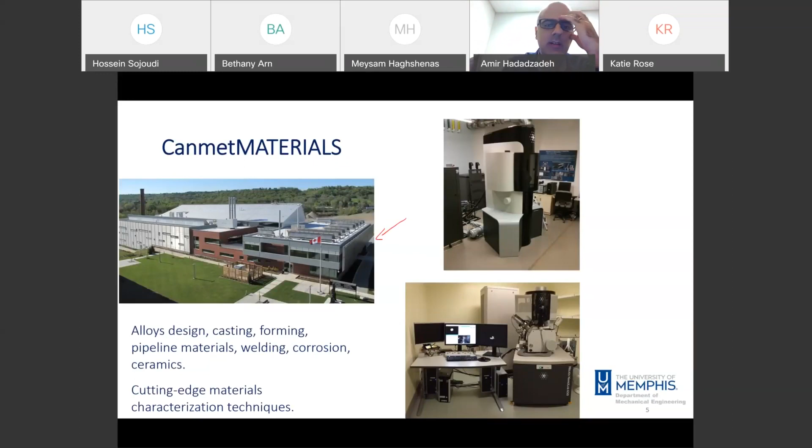Canada. In MAMCE, the Marine Additive Manufacturing Center of Excellence, we had a pretty big research group, engaged in broad collaborative research with different universities coast to coast in Canada. New Brunswick is here, and Canmet Materials was located in Hamilton, close to Toronto. So I spent most of my time in Ontario rather than New Brunswick. The reason I was at Canmet Materials was to use their state-of-the-art research facilities, including EBSD and TEM. This picture was taken during summer. I guess now they still have snow on the ground, and it was pretty cold, similar to your weather.

In terms of my research approach, my background is in materials science and engineering, and I'm really interested in the materials science paradigm, or tetrahedron, where we have 4 vertices: processing, structure, properties, and performance. It's very well known. I'm quite sure you have seen it before in any materials science textbook; if you open it, the text will start with this tetrahedron. Everything in terms of properties of a material is affected by the structure, and structure is determined by the processing. So it's very important to have knowledge of that.

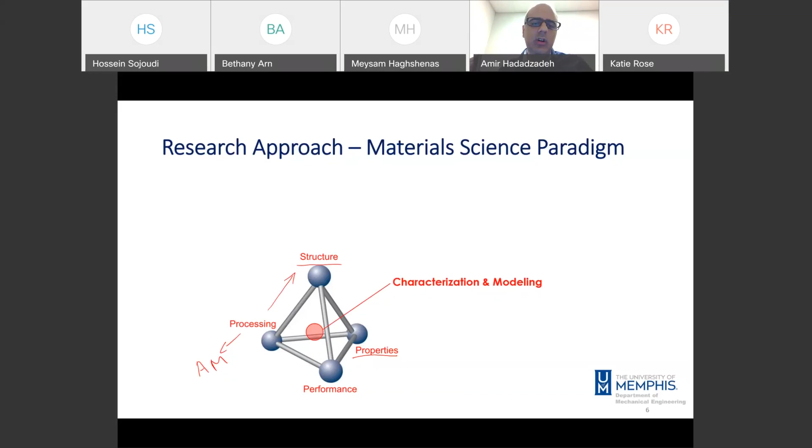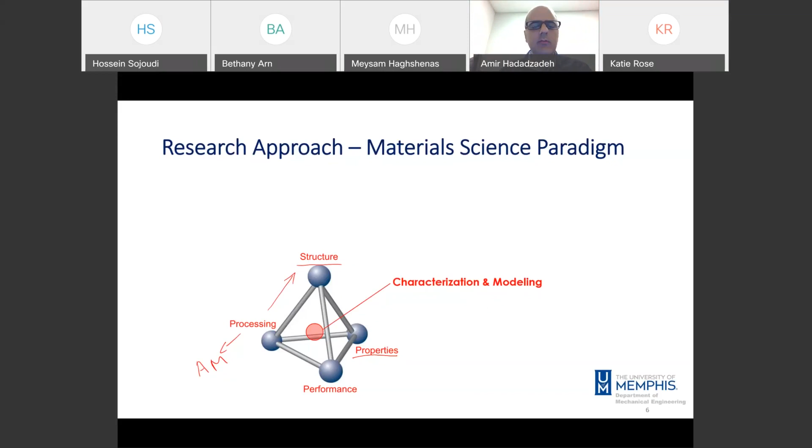In the case of additive manufacturing, processing is of course additive manufacturing, and what I'm doing is characterization and modeling. So I'm in the middle of this tetrahedron. I characterize the structure at different length scales to understand what is going on in the structure of the material, how the process has affected it, and how that structure will determine the properties. Today I'm going to talk about my research at MAMCE during those 2 years of postdoc.

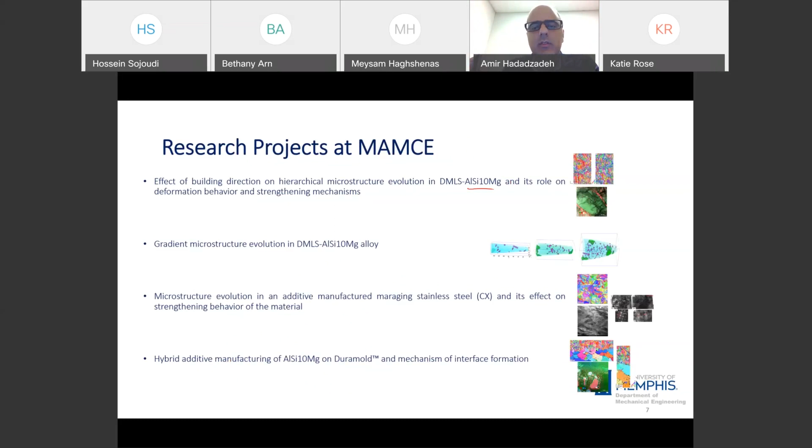So in MAMCE, I was engaged in a couple of research projects on different types of materials, including aluminum alloys. AlSi10Mg is probably the most common material for selective laser melting, which is a kind of additive manufacturing. Also, another type of metallic material, maraging steel CX, nickel aluminum bronze, which is a copper-based alloy, Ti6, maraging steel, and stainless steel 316L.

So a variety of materials, and in all of them, I was interested to explore the hierarchical microstructure. And again, if you go to the literature related to additive manufacturing of metallic materials, in most of them, you will see this term, hierarchical microstructure. So it means at different length scales, we have different features.

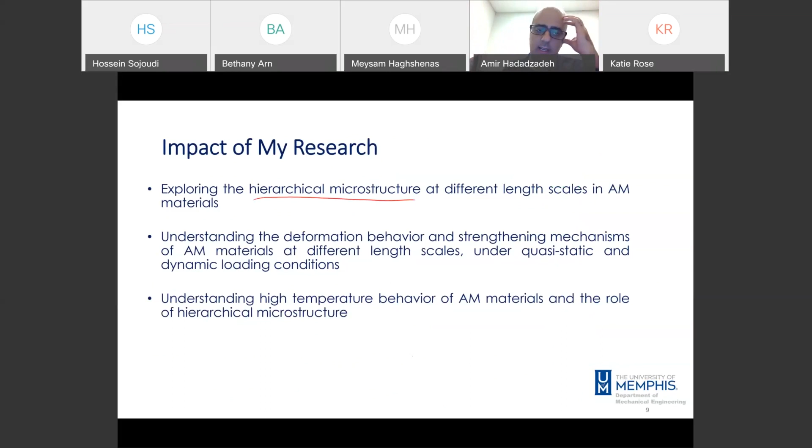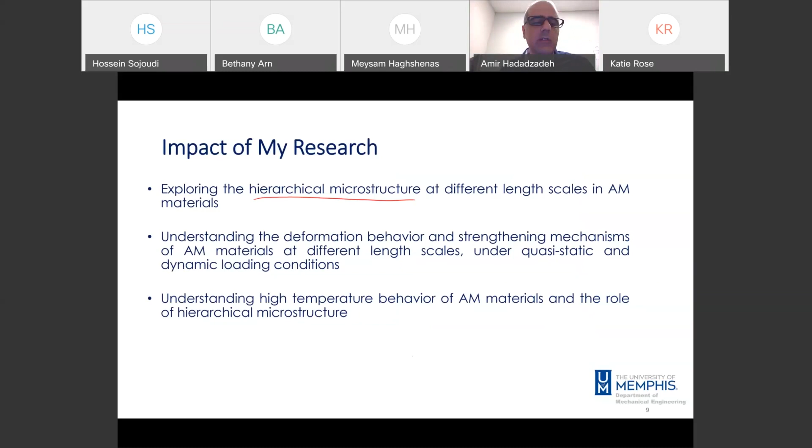So I'm exploring those features. And I'm trying to understand the effect of those features on the deformation behavior of the material and the role that they are playing in terms of the strengthening of the material, and also their effect on high temperature behavior of AM materials. We started a research back in Canada, and still I'm interested in that research, hopefully to continue that.

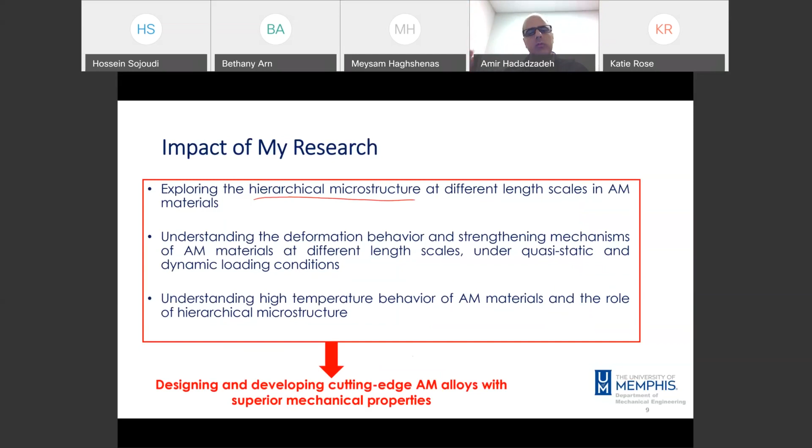And the outcome of this research, by understanding the effect of the processing on the structure of the material and how microstructure will enhance the properties, the outcome will be designing and developing advanced AM alloys with superior mechanical properties. We can also study other types of properties in the materials, like corrosion properties, physical properties, and so on and so forth, and try to correlate those properties to the microstructure as well.

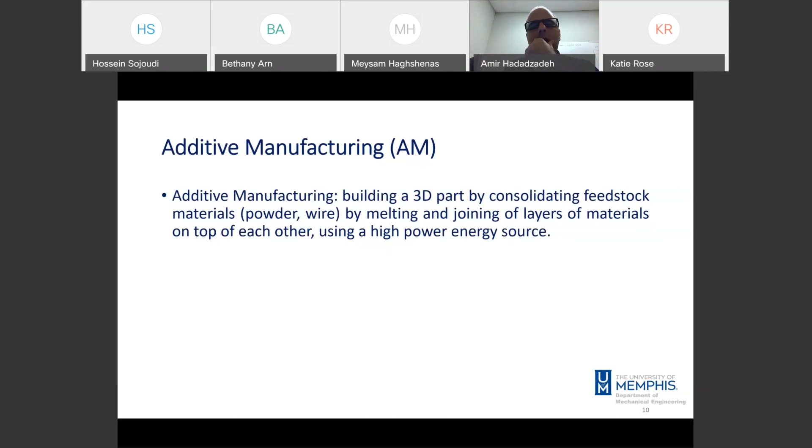So I'm pretty sure most of you are familiar with additive manufacturing. In additive manufacturing, we build a three-dimensional part by joining feedstock material on top of each other in a layer by layer manner. So in many cases, specifically for metallic materials, we melt and join those layers on top of each other. We usually use a high power energy source, and based on the ASTM standard, in general, we have two types of metal AM technologies.

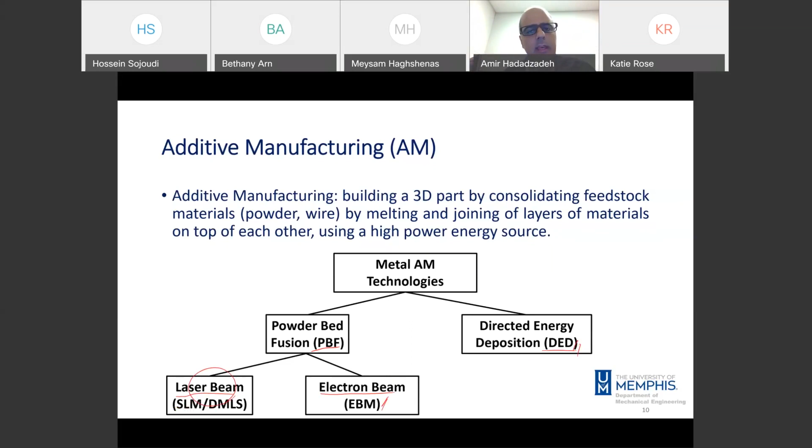We either have powder bed fusion, PBF, or directed energy deposition, DED. And depending on the type of the power energy source that we are using, we either have a laser beam or an electron beam. And the process that uses a laser beam is called SLM or DMLS, selective laser melting. And most of my research is around here. I've done some research on EBM and DED as well, but today I'm going to talk about only SLM.

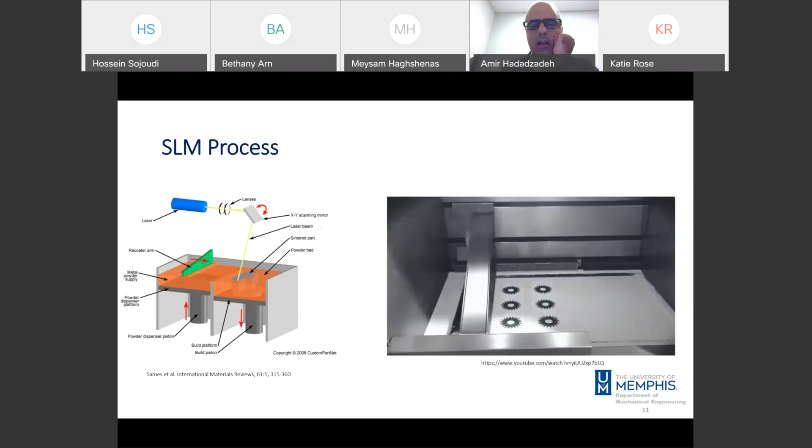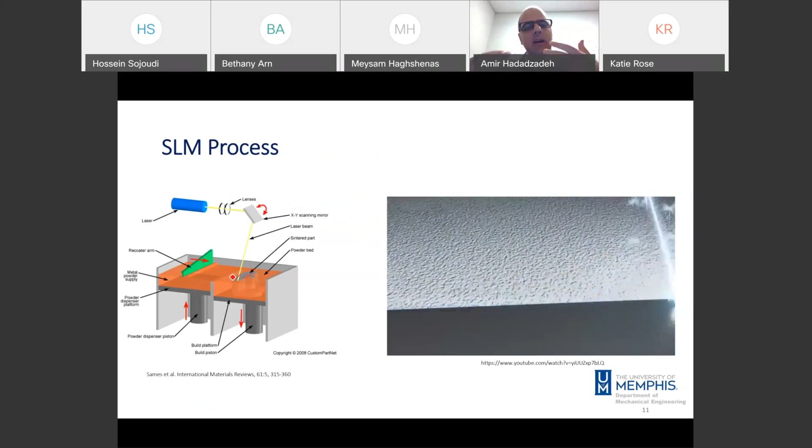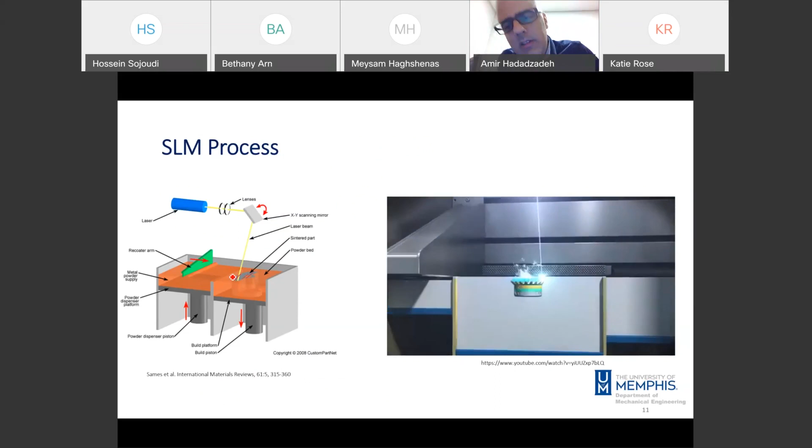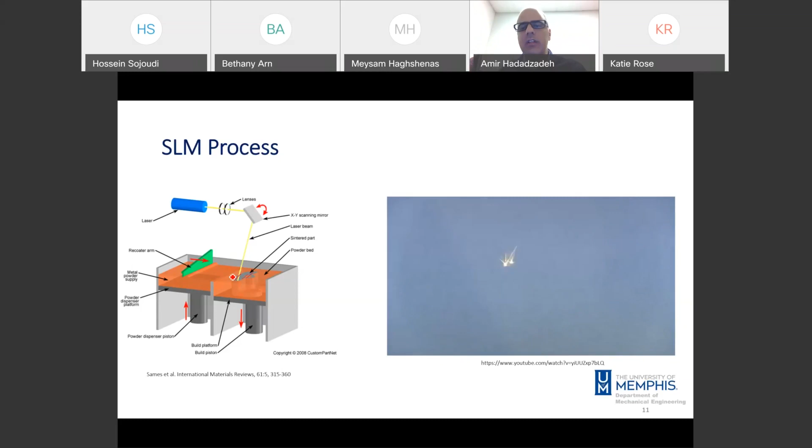So in SLM, I'm not sure whether I played the movie, hopefully you can see it. But in SLM, again, I'm quite sure you know that we have a bed of powder, and a laser beam will melt layers of material, and by adding powder on top of each other, we just build a component layer by layer. So there are many advantages in terms of using additive manufacturing. For example, we can have on-demand fabrication. We can fabricate complex parts in just one step of process, and many other advantages, as you know.

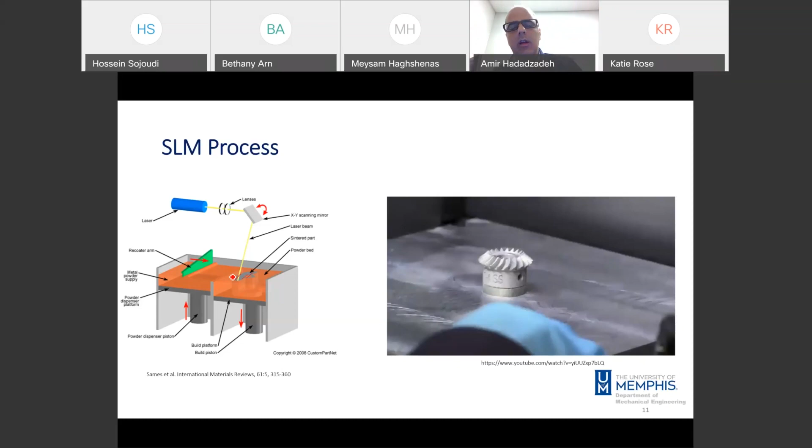But besides that, there is another aspect here, and that's the properties of the component that we are obtaining. It's not just about making a complex shape component. We should ensure that the final properties are desirable. So there are two perspectives in studying the properties, or specifically the mechanical properties of SLM components. We either study them based on the structural integrity or from material science.

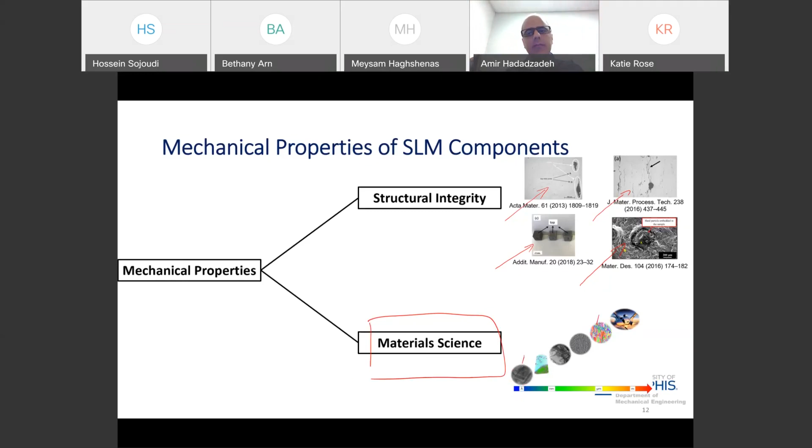But another point of view here, which I'm interested in, is studying the material from a material science point of view. To look at the microstructure of the material, to see how that microstructure at different length scales, from atomic scale, as you see here, up to sub-millimeter scale, how these features will affect the properties.

So I start with a case study here about development of hierarchical microstructure in SLM AlSi10Mg. AlSi10Mg is the most common aluminum alloy used for selective laser melting, because the composition of this alloy is close to the eutectic composition of the aluminum silicon system. So we have a narrow range of solidification, which is pretty helpful in terms of making a component without any significant defect.

So in this study, we fabricated two types of samples, two rod-shaped samples based on their orientation with respect to the building direction. We called them horizontal sample and vertical sample. The geometry of both samples was the same, but for the horizontal sample, the longitudinal axis of the sample was perpendicular to the building direction. And for the vertical sample, the longitudinal axis was parallel to the building direction. And we started

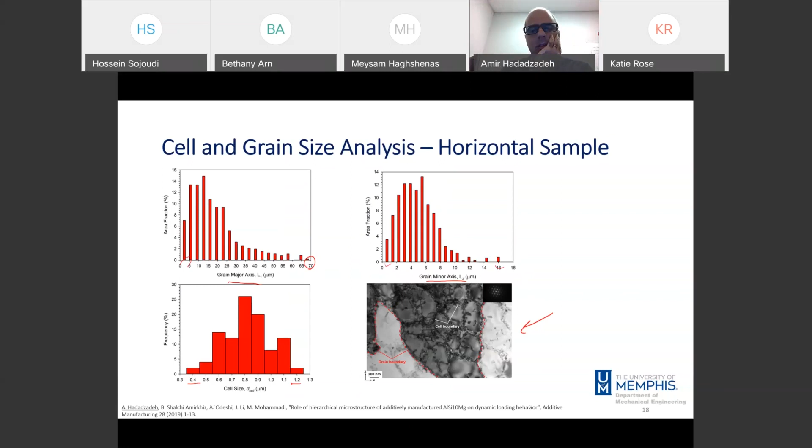So we study the sample by TEM, and this microstructure here shows the TEM structure in the 011 zone axis of the aluminum, and the red dashed line shows the grain boundary, and inside each grain we see several cells. That's why we see such a difference in the grain size and cell size.

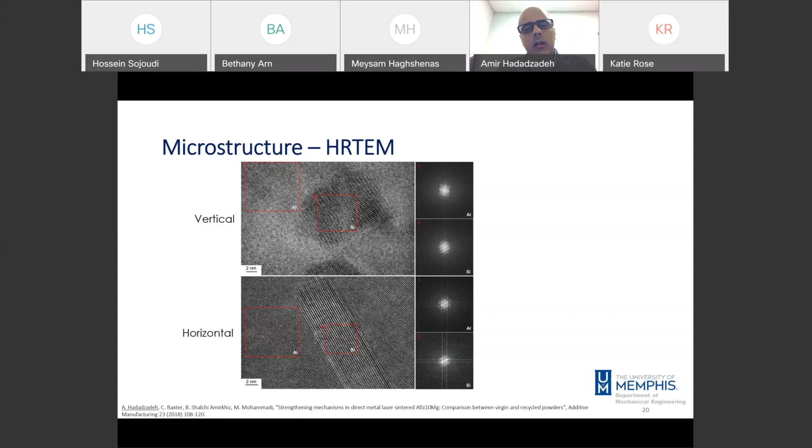I studied the silicon precipitates using high-resolution TEM, and we can see the atomic structure, and there is a crystallographic relationship between the aluminum matrix and silicon, as you see in this picture here. Another way to study the precipitates is using atom probe tomography. So in the APT technique, we can study the chemistry of a material atom by atom. And here, in the case of the vertical sample, this is a separate study, but it's quite interesting in terms of analyzing the microstructure consistency in AM material.

So if we have a long sample, like the vertical rod, from bottom to top of the sample, the material will experience different thermal histories. At the bottom of the sample, we have more repeated thermal cycles experienced by the material because the heat transfer direction is from the top layers to the bottom layers. That's why we see a difference in terms of the structure or the morphology and characteristics of the precipitates.

Here in the top of the sample, we see large silicon precipitates and very tiny magnesium-rich precipitates. By moving to the bottom of the sample, those silicon precipitates start to dissolve because these silicon particles are not a stable phase in this system, because in the aluminum silicon phase diagram, we don't have silicon precipitates or particles. These precipitates or particles develop because of the supersaturated aluminum matrix, because the silicon didn't have enough time to diffuse from the matrix to the eutectic wall. And that will affect the precipitate characteristics.

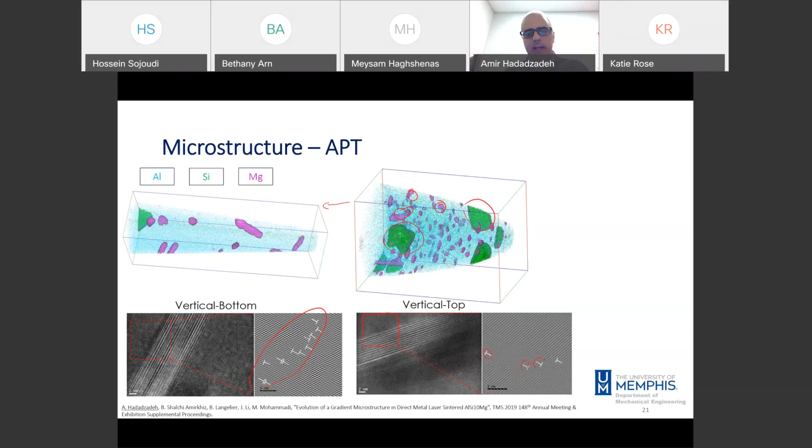So here on the top, we have a fully coherent precipitate with the matrix. Over the interface, we have probably a couple of dislocations because of the mismatch between the precipitate and the matrix. But at the bottom of the sample, as you see here, more dislocations evolve in the structure because of the mismatch.

So that's the general picture in terms of the hierarchical microstructure in AM materials, in this case, SLM. But there is a question here regarding the effect of hierarchical microstructure on the mechanical properties.

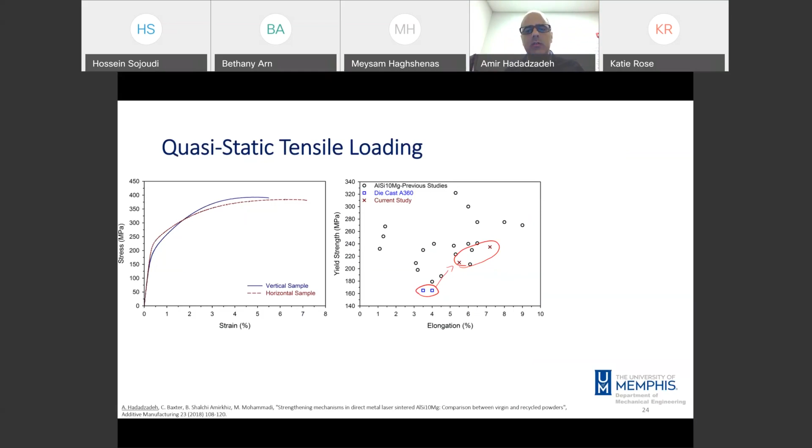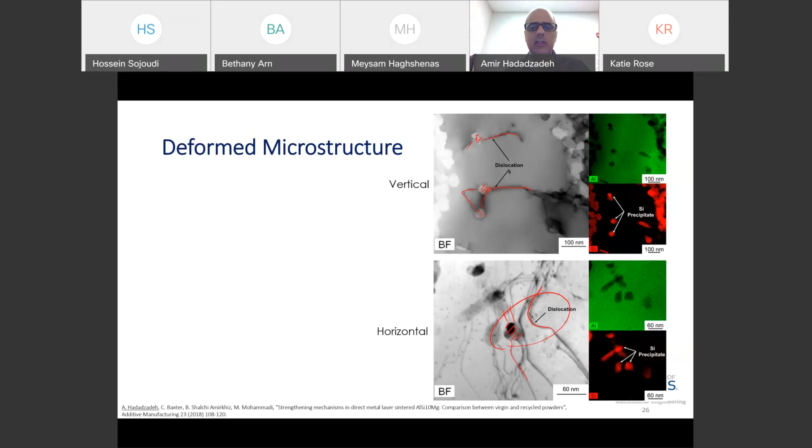If the dislocations are able to bypass the precipitates, like this case here, we see the effect of that. So this dislocation has gone toward the silicon precipitates after bypassing. And also there are some other dislocations that are still pinned by the precipitates. So precipitates are playing a role in the strengthening of the material because, again, they are hindering the motion of the dislocations. Considering these effects, we can use the fundamentals of alloy hardening to study the strength of the material.

So as I mentioned, the eutectic silicon walls are acting as barriers against the dislocation motion. So they act like grain boundaries. So their role is similar to the Hall-Petch effect. We have silicon precipitates. They can act as an Orowan strengthening mechanism, and we have the pre-existing dislocation network. So we have dislocation hardening as well, because in presence of other dislocations, there is an interaction, in most cases, a repulsive interaction between dislocations. So we have more hardening in the material.

Considering that, I don't want to go through all the details of the math here. I was able to predict the yield strength. Also, I measured the yield strength through the experiments, and there is a very good agreement between the measured values and the calculated ones, specifically for the case of vertical sample. As you see, 215 was predicted, and the measured value was 210 MPa, pretty close. But there is a slight difference between the yield strength in the case of horizontal sample.

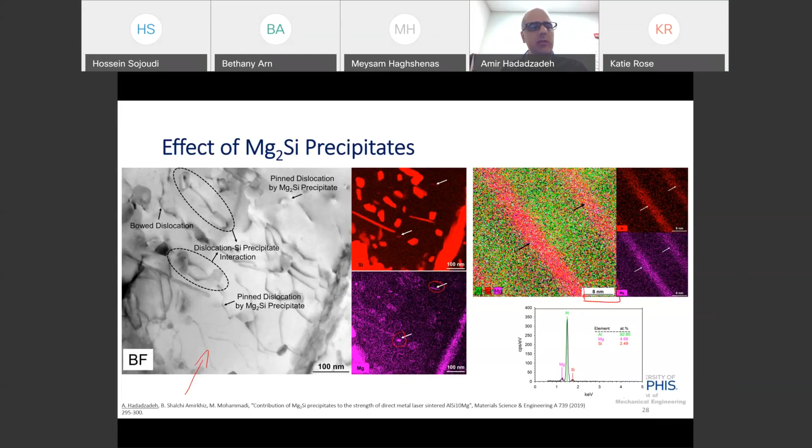Some cylindrical samples were machined out from that rod, and by using the split Hopkinson pressure bar, we conducted high strain rate deformation on the material at different strain rates. So here, stress versus strain at different strain rates from 800 per second up to 3200 per second. So there are two deformation regimes. The top graph shows the material behavior under high strain rate deformation. In these three cases, 800, 1200, 1400 per second, we see an initial hardening in the material up to a peak flow stress. Here is the peak flow stress. And then after that, once we stop the test, we have a softening.

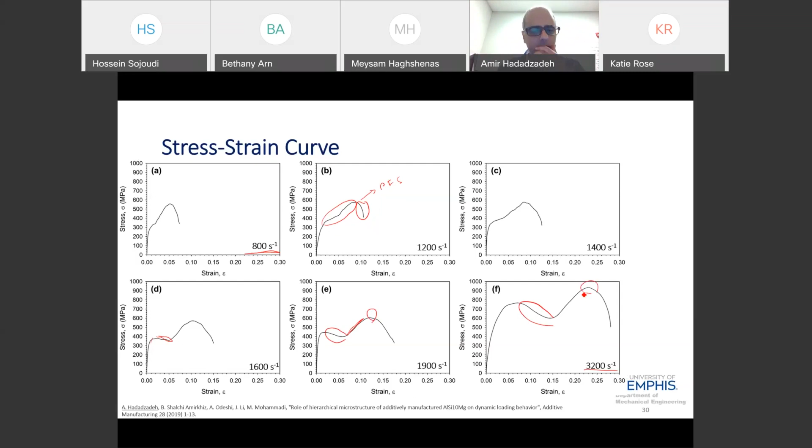This softening is not related to the behavior of the material. This softening is due to the reduction in the strain rate because we deform the material and we stop it. So during deceleration of the bars, we have such a drop in the stress. But in the bottom graphs, we see a different behavior. So after that initial hardening and reaching the first peak flow stress, now we have a softening in the material. So this softening regime in the material is observed, which is followed by the second hardening regime up to the second peak flow stress. So these are two different types of material behavior.

Again, to study that, I used the same hardening fundamentals: Hall-Petch, Orowan, and dislocation. And now we have another component, which is the strength increment due to strain rate. And there is a semi-empirical equation for that in the literature to correlate the increase in the strength of the material because of strain rate to the level of strain rate, and A and M are material constants. On the right hand side, I have shown the effect of strain rate on the strength of the material, both yield strength and the peak flow stress for different strain rates.

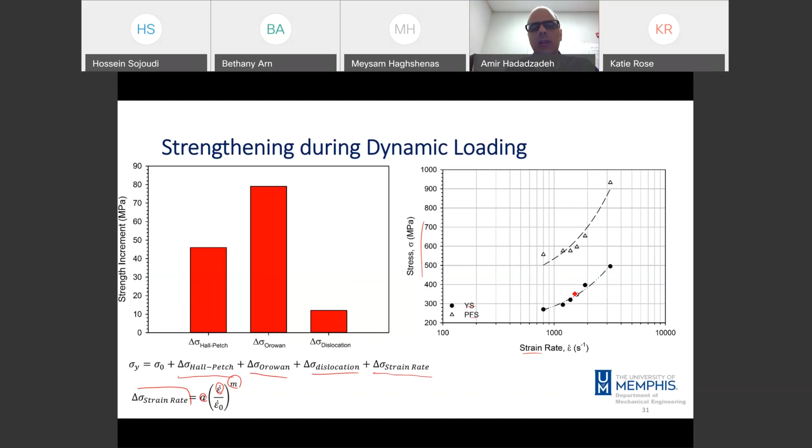If we subtract these three components, the Hall-Petch, the Orowan, and dislocation, from the values here, we can now end up with the increment because of the strain rate. Okay? And by doing a curve fitting, the values for SLM AlSi10Mg are shown here. A is 77 and M is 1.18. If we compare it to conventional aluminum alloys from the literature, you see different values, a significant difference between these two values, A and M. Or if I plot a graph for the conventional alloys on this graph, we'll have something like this. There is a significant difference between the two types of materials.

And again, the reason for such a difference is the hierarchical microstructure. I looked at the grain structure of the material using EBSD in two different deformation regimes at 1400 per second and 3200 per second. As you see, the deformation in the single peak regime resulted in evolution of a discontinuous low angle grain boundary network in the structure, the blue lines in here. By increasing the strain rate, those networks developed, and now we have a well-developed continuous network of low angle grain boundaries.

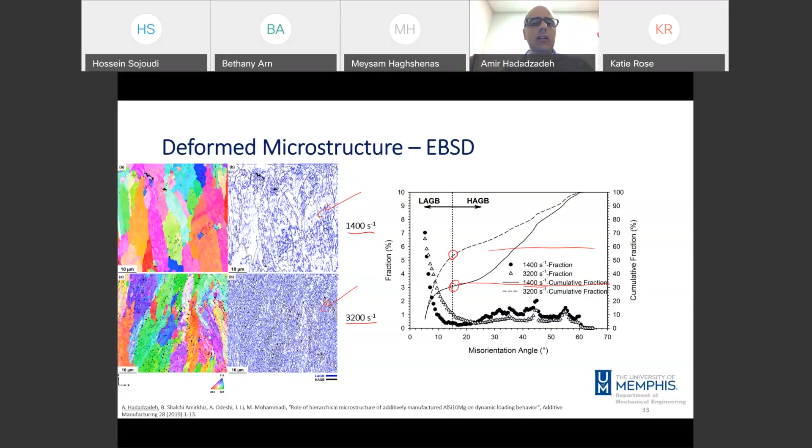If we analyze that, we see that for the 1400 per second sample, only about 30% of the structure is covered by those networks. However, by increasing the strain rate to 3200 per second, now about 60% of the grain structure is low angle grain boundaries. To analyze that, I studied the structure by TEM.

Again, since we are deforming the material, we have an increase in the density of dislocations because of dislocation motion and evolution of new dislocations. By increasing the strain rate, we'll have more heat in the material. The temperature will rise because of the effect of strain rate. Now, there's another driving force for motion of dislocations. Because of the temperature rise, the dislocations can rearrange and we can have recovery. Because of the rearrangement of dislocations, low angle grain boundaries start to develop in the material.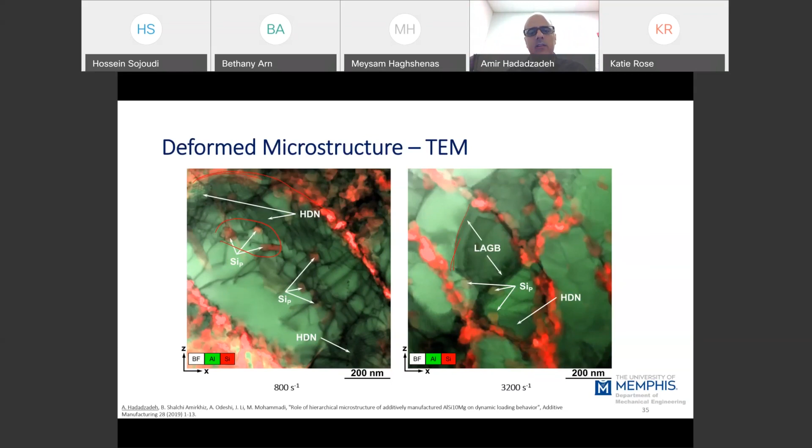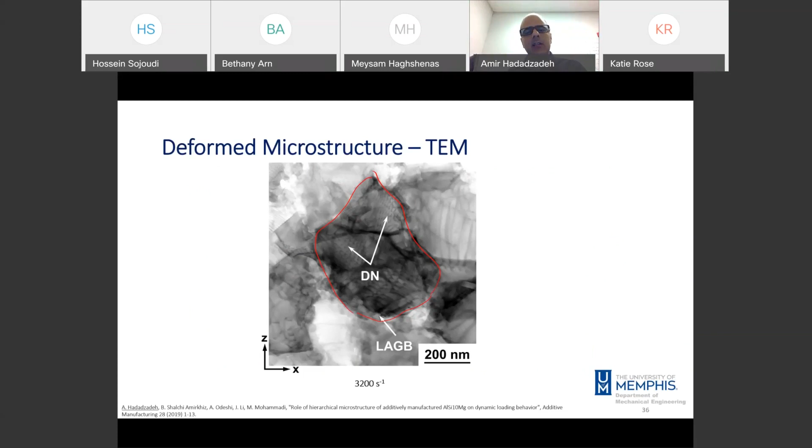Now for the second hardening regime, again, we have generation of new dislocations at high strain rate. After evolution of low angle grain boundaries, we have nanoscale grains. One of them is shown here, and they're bounded by low angle grain boundaries. Now the formation will continue, and because of the deformation, we have evolution of new dislocations inside the grains. That's why we have the second hardening stage. So the hierarchical microstructure in SLM affected both quasi-static and dynamic loading behavior of the material.

Since it's 12:50 or 1:50 your time, I can stop here because I have some other slides on SLM Corrax. I prefer to have more interaction with you, so I can stop here. Hopefully in future I can share the results on SLM Corrax, which is quite interesting, with you. But if you don't mind, I can stop here and answer any questions, or I can briefly go through these results. It's up to you.

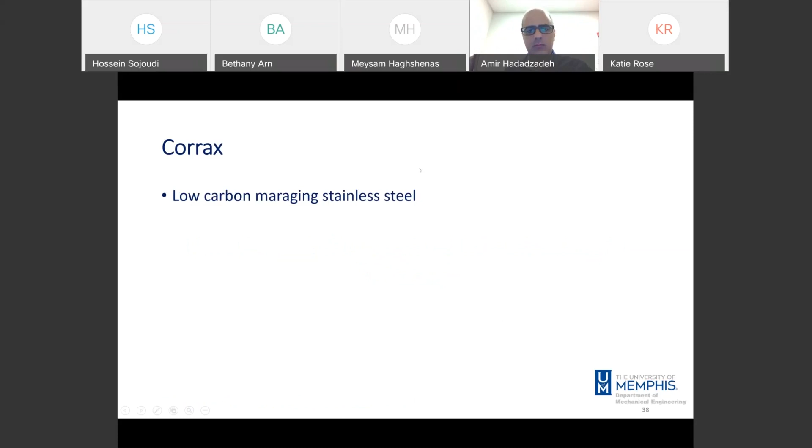Sure. Thank you. First of all, thank you very much. A very interesting talk. I think in the interest of time and to allow more interactions, perhaps it's better to stop here. So I'm going to ask everyone in the audience to please put your question. We have had a little bit of confusion. You can put your question in the chat box, or you can put it in the Q&A. If it's in the Q&A, just select all panelists. If you haven't heard your question, I'm going to go with names. Please put your question up there again.

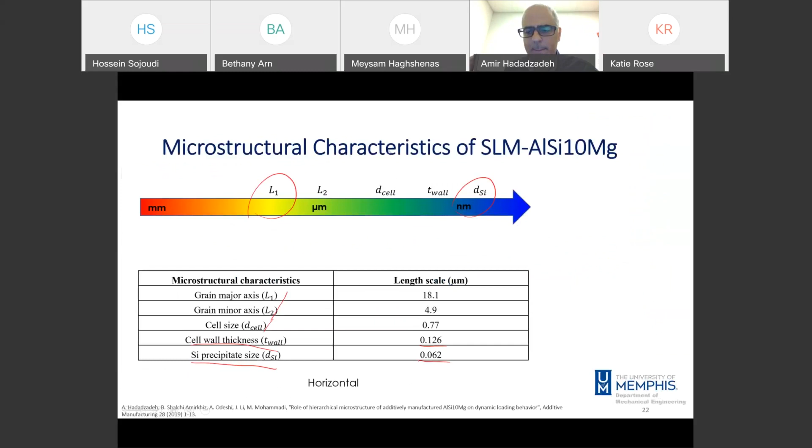So one question was about slide number 16, and that question is from Ravi. He asked what is the difference between vertically and horizontally fabricated samples when it comes to grain structures and grain boundaries? Okay, that's a great question.

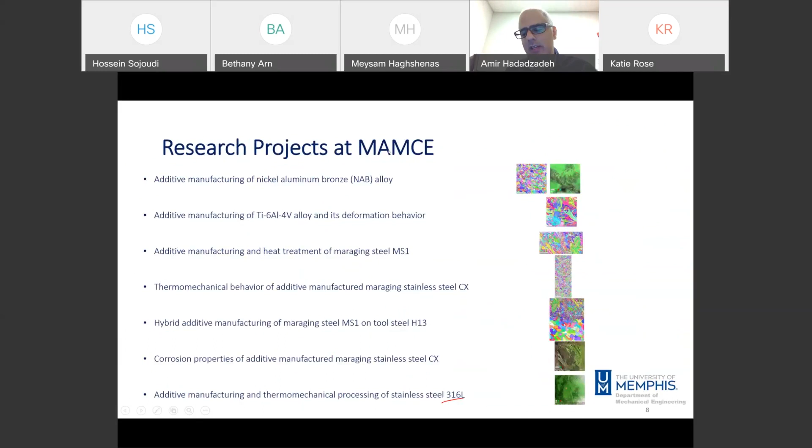Sorry, okay, it's not stopping. It's not my fault. I'm not touching anything. It's just going by itself. Let me try to exit. Okay, that's good. I jumped to 16. Yes.

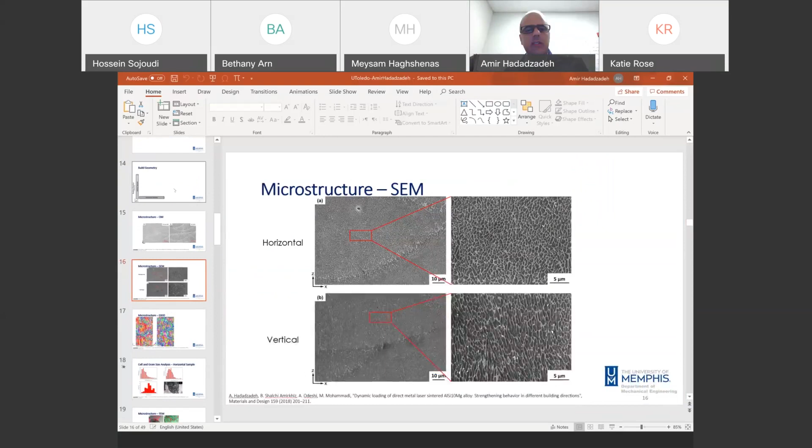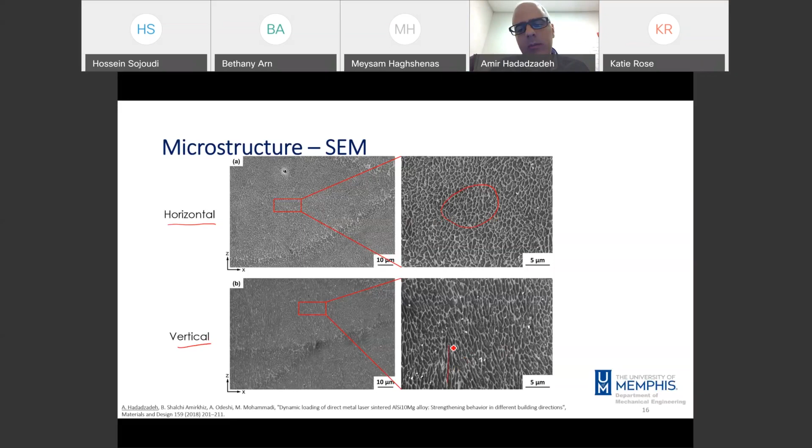If we change the geometry, we are changing those boundary conditions, and as a result, we will have a different grain structure. So here, for example, in the case of the horizontal sample, I didn't want to go through the details because it's a long and complex topic considering the solidification in the material. But generally, I observed that by changing the geometry from horizontal to vertical, there is a change in the morphology of the structure. So here, more or less, we see an equiaxed cell structure, while in the case of vertical, we see a bimodal structure or one dominated by columnar structure.

And we see the same trend in the grain structure. In the case of the vertical sample, on the left-hand side, this is vertical, this is horizontal. In the case of vertical, the majority of grains are columnar grains, while in the horizontal sample, we have a bimodal structure, and I can say most of the grains are equiaxed. And that is because of the change in the thermal boundary conditions and the thermal history experienced by the material. So that's a general answer to this question. But if you really need more details, this is our paper in Additive. You can take a look at that paper. I have used a solidification model to elaborate on how this kind of microstructure evolves in the material.

Thank you, Dr. Hadadzadeh. So, Ravi, if you have a follow-up question, please post it there. The next is Pavan, who was thanking you for answering that question in the middle of the presentation. The next question is from Kayvon. He's thanking you for the great presentation, and he is asking a question regarding the dislocations. What is the effect of a high density of dislocations on mechanical properties? How can we tailor the dislocation density via SLM process parameters?

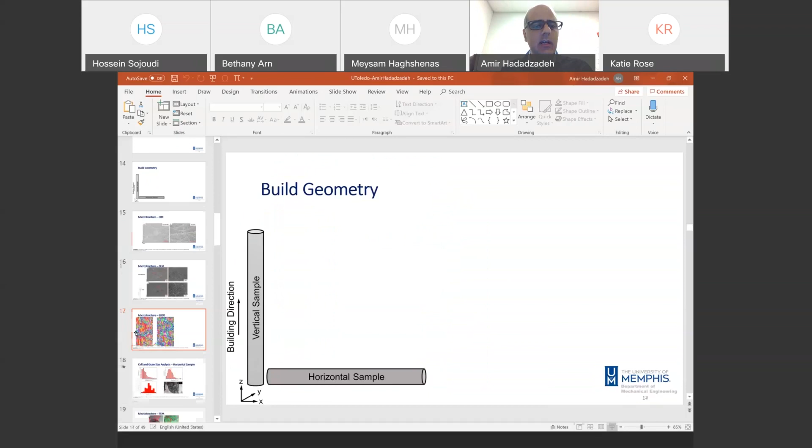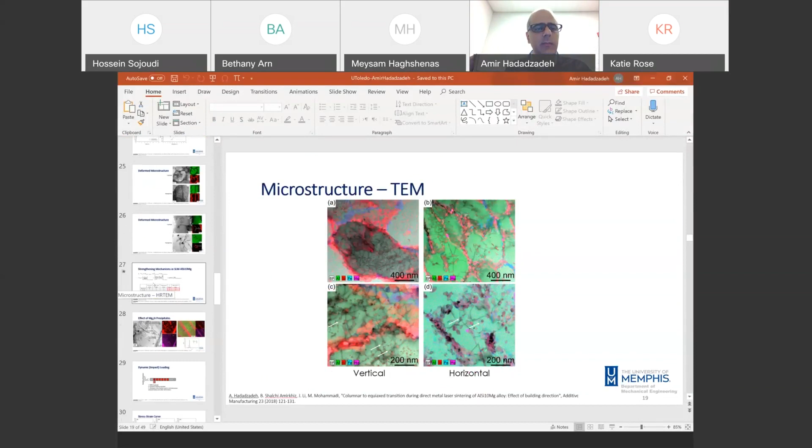Oh, that's a very good question. Again, dislocations are important in terms of enhancing the mechanical properties because of dislocation hardening. If I go back to this slide here, because of the rapid cooling during this process, the dislocations will evolve in the microstructure. And it is very well known that by increasing the density of dislocations, we can increase the strength of the material because the dislocations interact with each other. Again, as I mentioned, there is a kind of repulsive interaction between them. And in this equation, as you see, if we increase the dislocation density, we can increase the strength increment coming from dislocations. So this is basic knowledge coming from material science.

But the good question here is how we can control the evolution of these dislocations. We observed that by changing the build direction, here horizontal and vertical, there was a slight difference in the contribution of dislocations to the strength of the material, because we observed a different dislocation density in the two samples. Again, that is coming from the thermal history experienced by the material. In the SLM process, the cooling rate is very high in nature because of the size of the liquid pool that we are dealing with.

And that ultra high cooling rate will result in the generation of dislocations. But the good question is how we can promote that. If we can find a way to increase the cooling rate in the process, probably we can promote dislocation formation in the material. Another way is probably adding some alloying elements to promote the formation of precipitates, because when precipitates develop in a material, we will have mismatch dislocations between the matrix and precipitates, and that can be another way to tailor the structure. But this is a big question. We could do significant research in this field to really address that question.

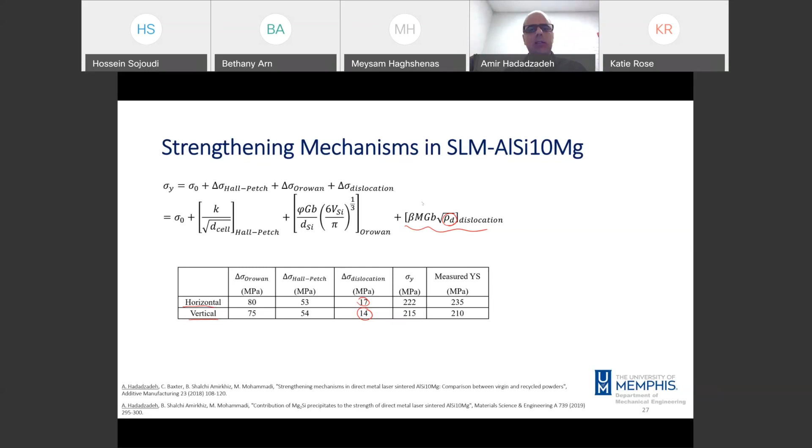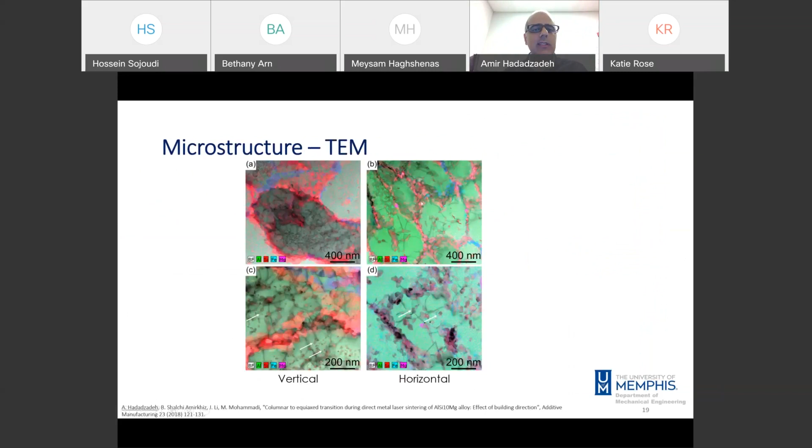Well, I guess from what I studied in the optical microscopy and also SEM, I really did not observe a significant difference in terms of the layers morphology. We go back here. Well, honestly, I didn't quantify their size, but I have some low mag images as well. I didn't report them here. I really did not observe anything in terms of their morphology.

And also, there was no major concern regarding their overlap or the interaction between different layers, or what you call adhesion. Because during the mechanical test under tensile loading, the properties of the materials were pretty similar for both horizontal and vertical samples. So we didn't observe any evidence of any problems between the layers.

Thank you. I have another question from Mohammad Reza. The question is, in terms of grains that you showed in EBSD maps, what are the pros and cons of having columnar grains? Would you prefer to have a bimodal grain structure instead?

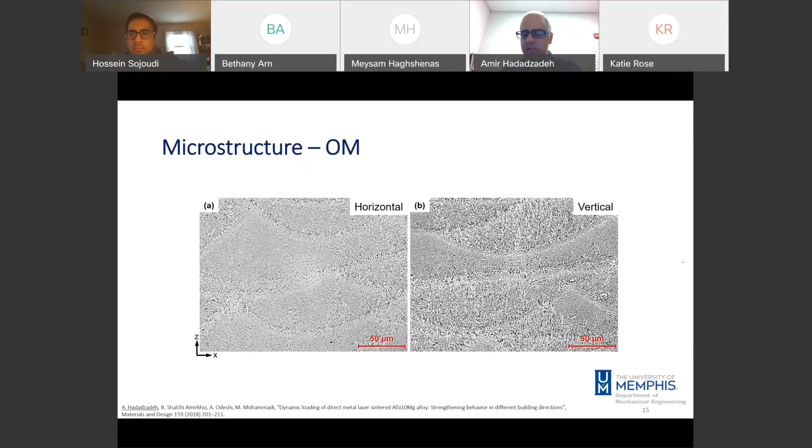Again, another good question. In general, if we go back to literature, there are some fundamental studies on the effect of columnar structure on the properties of AM materials, and this columnar structure usually develops because of epitaxial growth. This is a classic study in the context of welding. And when we have columnar grains, we have a textured material because the grains are developing along a specific direction. Here, for example, we see more red color in the case of the vertical sample. This red color shows that we have a 001 texture. We have a preferred texture here.

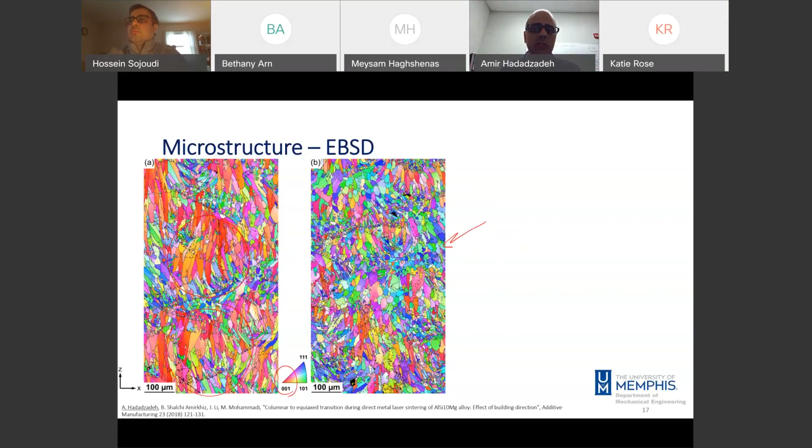By changing the morphology to equiaxed, we still have a textured material, but with less intensity or more random texture. However, I was not able to find any significant effect of such a texture on quasi-static behavior of the material, at least in the case of SLM AlSi10Mg. In general, people, for different materials, prefer to have a more equiaxed structure rather than columnar structure, because for the columnar structure, we will have oriented properties, or we have a texture structure that can affect the property in different directions.

Thank you. Pavan has a question before I go to Dr. Haghshenas. There is a follow-up question, actually. Can we eliminate the defects with post-processing? And for aluminum alloy, are you using pure aluminum for the process? If not, can't we choose a different grade of aluminum with high or low silicon ratio or magnesium based on our calculations?

So to address the first question, there are some post-processing techniques to eliminate the defects, specifically porosities and voids, by doing hot isostatic pressing or HIP. We can close the pores by that process, which is very common in the field of powder metallurgy. However, I didn't use that. I didn't use any post-processing to eliminate the pores. To address the second question,

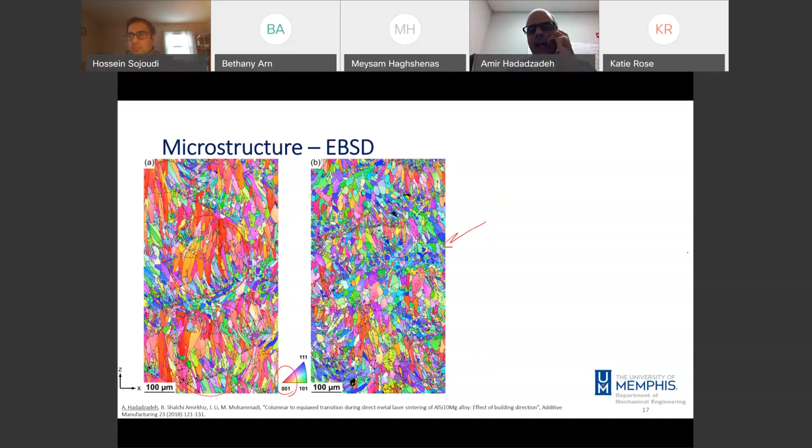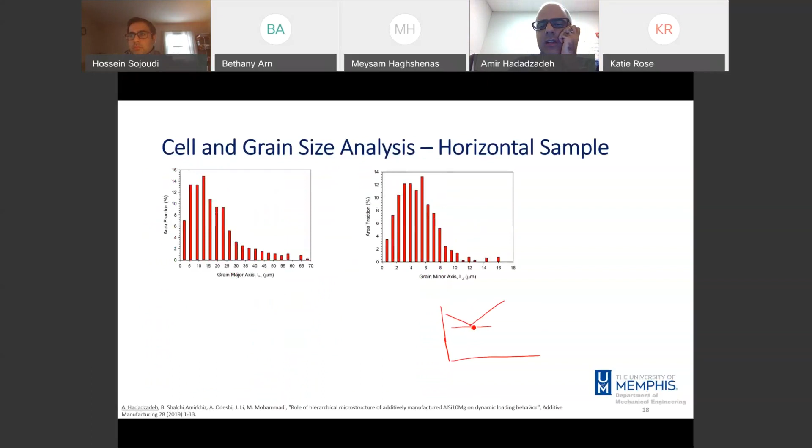the material we used was aluminum silicon, about 10% silicon and a little bit of magnesium. The reason we use that system, again, as I mentioned, is that if we recall the aluminum silicon phase diagram, if I am able to draw it, that composition is close to the eutectic composition. So here is the eutectic composition, about 11% of silicon.

If we decrease the amount of silicon, we are moving to the left, so we will have a larger solidification range, which has detrimental effects on the final component, because there is more tendency for hot tearing, crack formation, and all of these defects. So it's a good idea to move towards this point.

That's the first point. And second, magnesium, we can add more magnesium to promote formation of Mg2Si. We didn't do that, but I guess this is a good opportunity to promote Mg2Si, because we showed that Mg2Si can play a role on the strength of the material.

Thank you. Dr. Haghshenas has a question. I think he's going to ask that question himself. And after that, I'll have one follow-up question from Mohammed Reza. Meysam, please go ahead. Sure. Okay, thank you so much, Amir.

I would like to start with a big thank you to you for accepting this invitation and providing this wonderful, great talk. I always enjoy these high-quality TEM images. It's like some family pictures. I really like them.

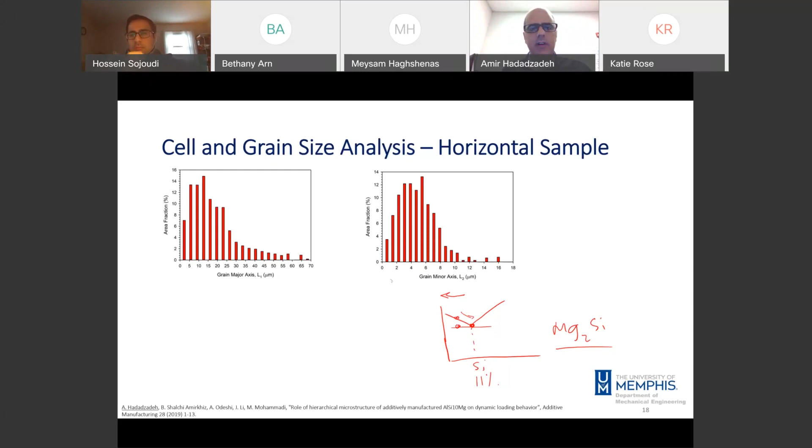I have a quick question on strain rate sensitivity, which you showed on additive manufactured aluminum silicon 10 magnesium. Imagine you run the exact same tests on a cast counterpart. Where would you see this cast counterpart sit on that plot that you showed? Is it upper or lower?

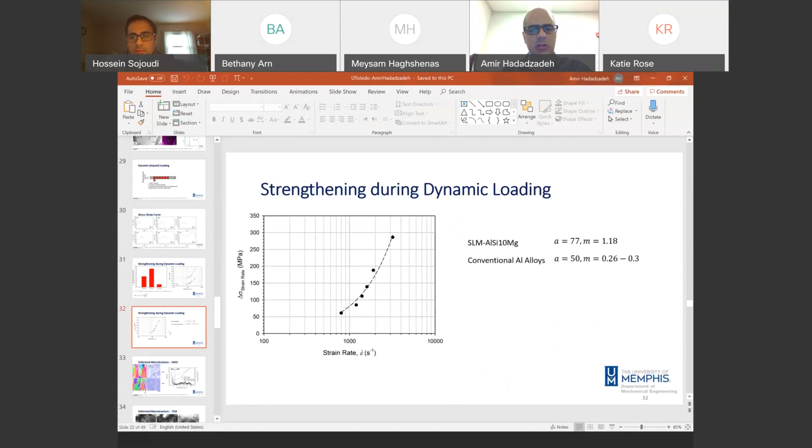Okay, so let me go back to the plot. I guess you're talking about number 31, 32. Yes. Let's assume you run this test on a cast counterpart. Considering these values, let me go back to the previous. Oh, it doesn't work. Anyway, these values are coming from literature. So 77 and 77 and 1.18. Those are the values that I evaluated based on my own experiments.

For conventional cast aluminum alloys, I was able to find the values from literature. If I plot that here, we have a graph something like this, and probably something over here. So there's a difference in terms of the effect of strain rates and the strength increment in two cases.

I tried to address the effect of hierarchical microstructure on this strength increment in my study. But since I didn't study a cast counterpart systematically, similar to what I did for the SLM AlSi10Mg alloy, I really cannot answer that question, how the microstructure of a cast material will play a role on such behavior. Okay, good. Thank you so much.